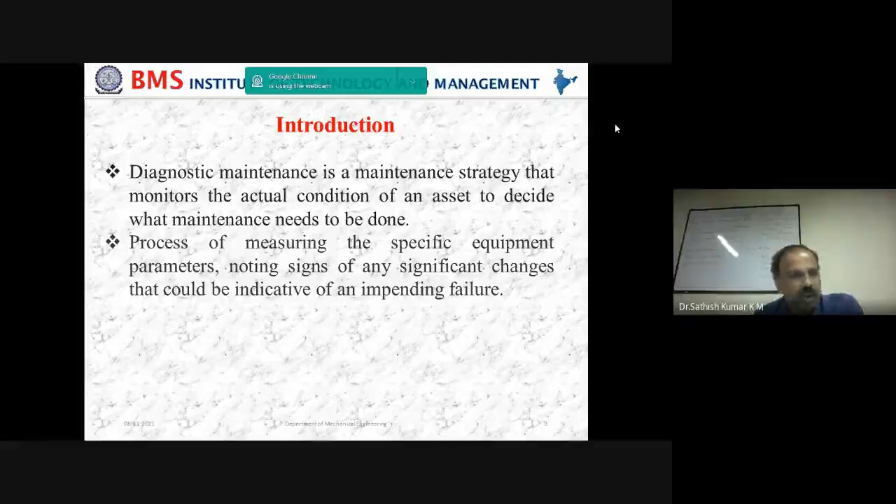Now what might be the basic goal of diagnostic maintenance? Basically, the goal is to monitor and spot upcoming maintenance or equipment failure. That is very important, so we are going to proactively schedule when exactly the maintenance strategy has to be made, and not before.

Now what's going to happen if it is a breakdown maintenance? You let the breakdown occur. It's a very simple technique, you let the breakdown occur. Once the breakdown has occurred, then you do the analysis and the rest of the activity.

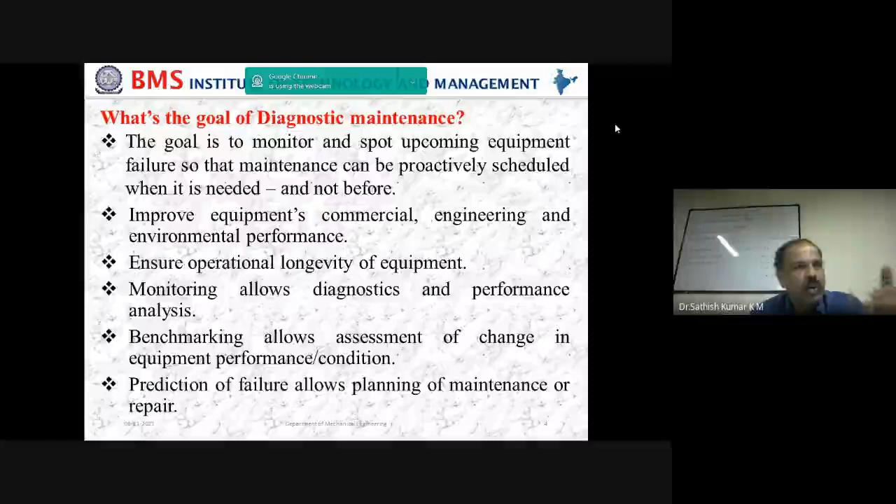If it is going to be a preventive maintenance, every now and then you plan your activity, you make what is called the plan to occur. In case of preventive maintenance, there is going to be a fixed schedule of maintenance. So whether it is required or not, at those fixed schedules you are going to check the machineries.

But in case of diagnostic maintenance, it is the process wherein you are checking the health of the machineries continuously and take an assessment when it is needed, and not before. That is very, very important.

By doing this diagnostic maintenance, it improves equipment performance with respect to availability. Maybe commercial availability means if it is available more, we will be getting more profits, along with engineering and environmental performance. It ensures operational longevity of the equipment, which is much required. If the machines are available for a longer duration of time, then it is ensured that you could produce some component out of it.

Monitoring allows diagnostic and performance analysis. Benchmarking allows assessment of change in equipment performance and condition. So monitoring, benchmarking, and prediction of failure are the main goals of diagnostic maintenance which are present.

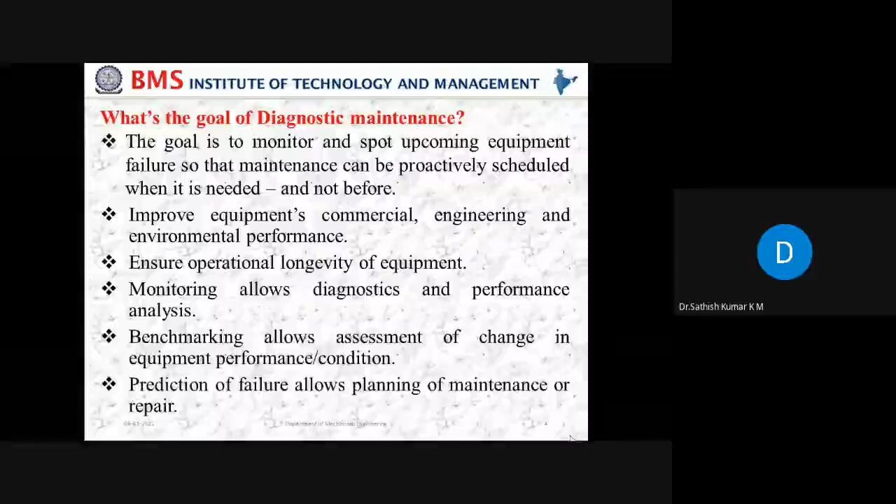With this brief on the goal, we'll just move on to the methods. When you go with the methods of diagnostic maintenance, we have two different diagnostic maintenance methods which are present: one is called trend monitoring, the other is condition checking.

Now we shall just go on understanding one by one.

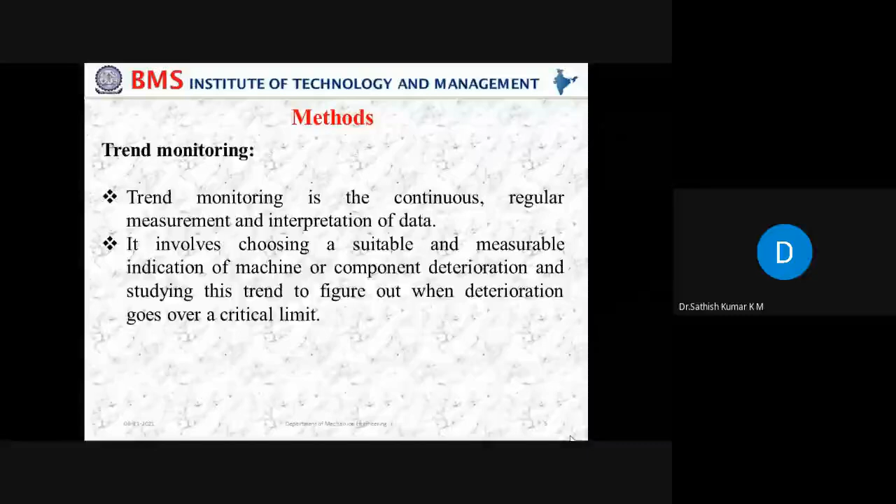Then the second one is called condition checking. The second type is condition checking, where it involves taking a periodic check measurement with an appropriate indicator while a machine is running. This is very important - it's what is largely used in industry, where you continuously go with a periodic check measurement with an appropriate indicator while the machine is running.

The information from this method is then used to measure the condition of the machine at a given time. Once you take note of the values that you've got, then based on those values, you measure the condition of the machine at that point of time. So this condition checking involves broadly three different steps.

So basically it is detection, diagnosis, and... the first one is detection. When I say detection, it refers to the 'when' aspect - it involves identification. The detection involves identification of the developing fault at an early stage. It tries to detect.

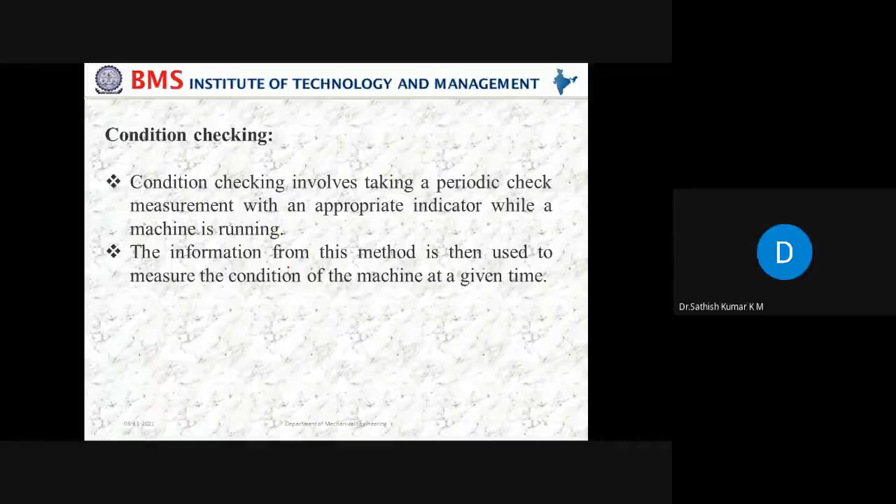Then when it comes to the different types of condition monitoring, basically we have the offline condition monitoring method and the online condition monitoring method.

So basically, if it is going to be offline condition monitoring, the work involves stopping the machine to take the vital parameters. It is not advisable in an industrial environment to stop the machine for this type of activity. So generally offline condition monitoring is used for less critical or semi-critical assets, where periodic scanning is good enough to observe the current condition.

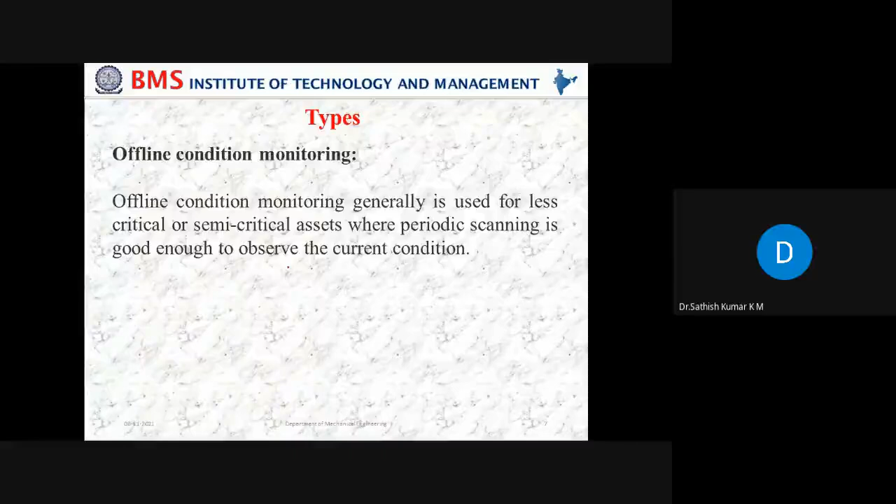But largely what we use is what is called online condition monitoring. Here, what is very important to know is the importance of sensors. The role of sensors is going to play a major role in online condition monitoring, wherein you are going to wirelessly connect the machine-mounted sensor to the software.

So you will have sensors mounted on the housing of a bearing, sensors mounted on the headstock, sensors mounted beneath the tool. You might also be using an infrared gun pointed towards the cutting tool to measure the temperature. These are all machine-mounted sensors.

Now, from these machine-mounted sensors, we try to take the information to various different softwares that are available, the diagnostic softwares, to know the real-time happening on the shop floor. Therefore it is very clear to state what is happening.

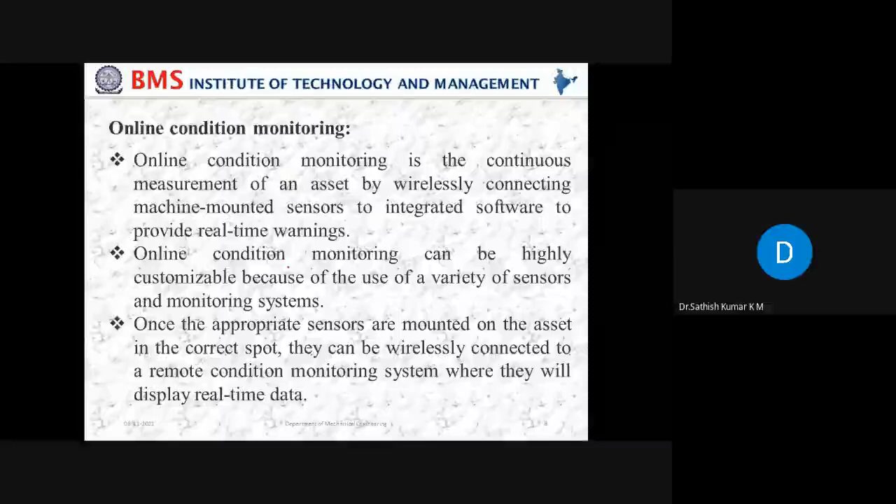That is very important - you need not sit there in front of the system or in front of the machine to see the activity. You can remotely connect the readings to the systems at the office environment, and you can sit at the office and observe the real-time variation of the data. That is the beauty of online condition monitoring.

Now, continuing with that, it's also possible for you to integrate multiple sensors - that is a multi-sensory approach. This is very important, because for an impending failure to occur, please understand it is not only the vibration that matters, it is not only the acoustic signals that matter, it is not only the temperature, it is not only the ultraviolet rays that matter. The failures can be detected through various different parameters.

Hence, it could be possible for me to take the vibration data, or the thermography data meaning the temperature data, or the acoustic data, at a given time. When you take this data, it is possible for you to give real-time alerts to various different people who are present with these activities.

So with the understanding of offline and online monitoring, basically what we are looking at is only the online monitoring, where we are going to extract the data from multiple sensors and analyze that data in various diagnostic maintenance software, and based on the data we analyze, we are going to say what action needs to be taken if there are changes in the critical parameters.

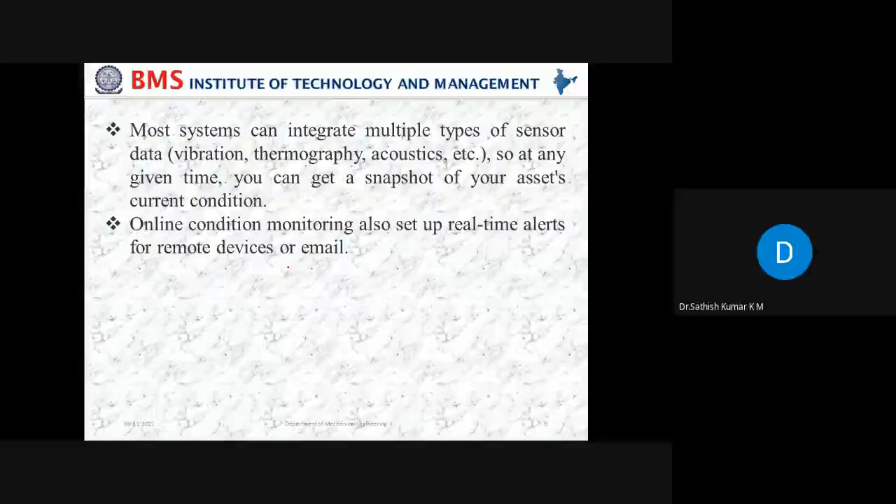Okay, so that is basically right. Then we'll just try to understand something called the PF curve.

This PF curve has time on the x-axis, and on the y-axis we have the condition of the asset, or the health of the machine. So with variation in time, how the health of the machine varies, that's the PF curve.

Over a period of time, I'm talking about the interval between the potential failure and functional failure. P is the potential failure, F is the functional failure. The potential failure is defined as the starting point at which the machine starts to deteriorate.

It is the point where the problem starts to begin. Then the functional failure is the point where it has reached the stage where it is no longer possible for it to function anymore. That is the last stage of operationality of the machine. So potential failure is the first stage of the problem beginning, and functional failure is the dead state.

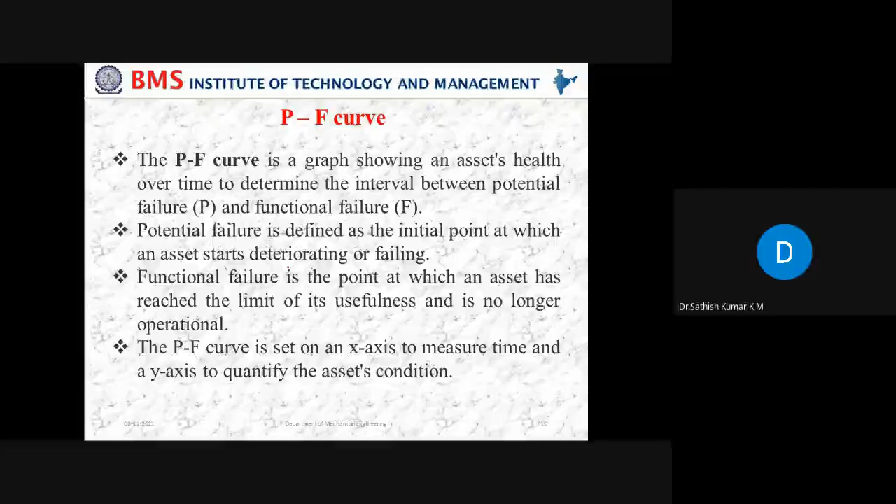Now this is what is called the PF curve. It looks something like this. This is where the problem started - potential failure, the problem has started, and as time progresses...

the health of the machinery starts to reduce, and at a certain point of time, there is going to be a functional failure. That means at that point, the machine is not available, the machine is not functional, that's it. Now the time interval between the potential failure and the functional failure is what is called the PF interval.

Now as a diagnostic maintenance engineer, our job is to make sure that you need to have a diagnosis well before this PF interval, right? Because this is where the problem started to occur, then this is where the problem ends.

The problem has reached the maximum stage. So when you plan, make sure the maintenance activity happens before the PF interval. If it happens after the PF interval, it means you've taken the diagnosis option once the machine has already failed, which doesn't make any sense at all.

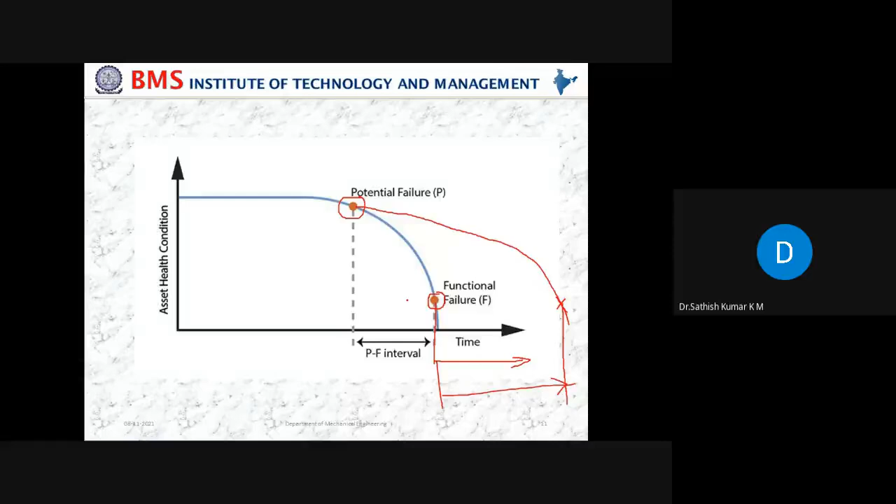So probably, just as a picture - this is going to be my point of failure. Let's say I could increase from this point to this point. I have elongated, I have improved the life of the machine to this extent by having a proper diagnostic operation or proper diagnostic maintenance. That is what is called the PF interval.

That means condition monitoring plays a significant role in detecting the PF interval of the PF curve. So as I said, the PF interval is the time between an asset's potential failure and its predicted functional failure. Now what is required is the inspection interval should be smaller than the PF curve.

Now the inspection - what are you going to do? It should be smaller than the PF curve, and it should end up maximizing the PF interval. So this is very, very important. The ultimate objective of diagnostic maintenance is to increase the PF interval. So this is about the concept of the PF interval.

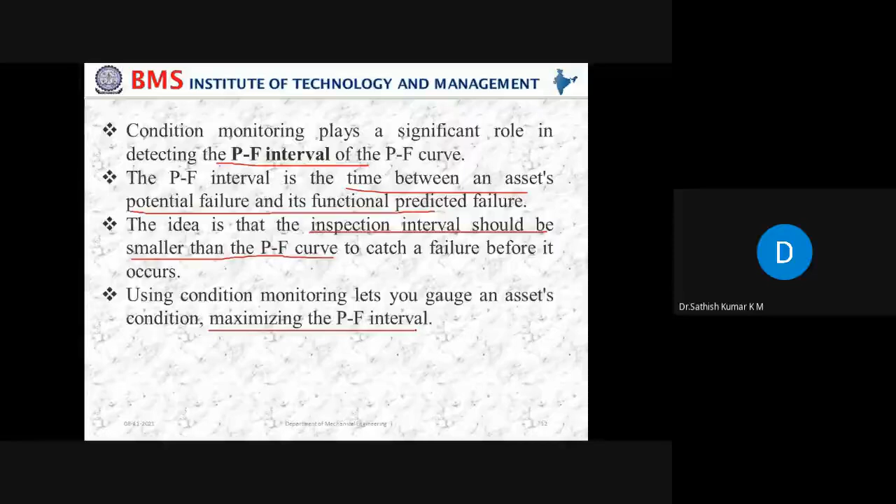So now with this, we've covered the basic idea about the introduction to diagnostic maintenance, the types and methods, offline and online monitoring, and the PF curve. Then we'll switch over to the various different diagnostic maintenance techniques which are available. I will briefly touch upon the various techniques, and later in the sessions you will have a session exclusively on these individual techniques.

Okay, as the first session, I just thought to have a brief idea about all this.

Now when you go with the diagnostic maintenance techniques, I just listed the commonly used ones: visual inspection, vibration monitoring, AE monitoring or acoustic emission monitoring, oil analysis, infrared thermography, ultrasound testing, and remote visual inspection. So these are the commonly used techniques.

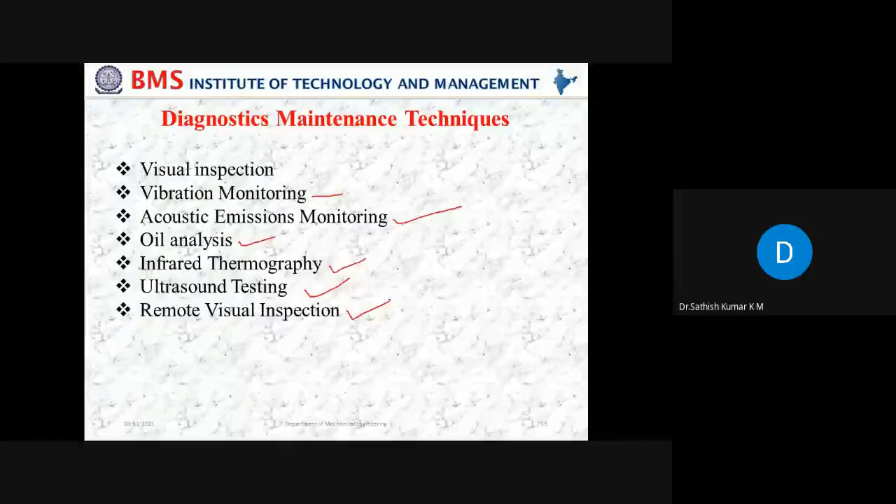Let us just have a look at each individual technique, what exactly they are about. Now, visual inspection. It's pretty clear. So what is visual inspection? Seeing is believing. I'm going to observe, make a note of it, and make a decision. As simple as that. Basically it's an inspection of an asset made using the naked eyes. You just observe.

While moving in the shop floor, you keep on observing what exactly are the changes present on the machine. Even though it's just an observation, it is very much required to have specific training, so that at least the inspector knows what to observe. That is very important. Just observing doesn't make any sense. What you need to observe is what matters in visual inspection. Otherwise this visual inspection is just like a tour, and nothing is going to come out of that. So what to observe is what matters.

As you know, it is the very oldest one to evaluate the condition of an asset. Here the goal is to find anything that might be wrong with the asset which could require maintenance. It is not specific to any particular parameter; it is on the overall front of the machine. You just look at the machines and understand what might be the problem.

But generally, this visual inspection cannot be considered authenticated, or you can't rely completely on visual inspection, because there are impending failures happening due to parameters within the system. Anything outside the system you could observe and gauge, but some changes happening within the body are highly impossible for an inspector to look at. Therefore, we come to the various different types of monitoring systems.

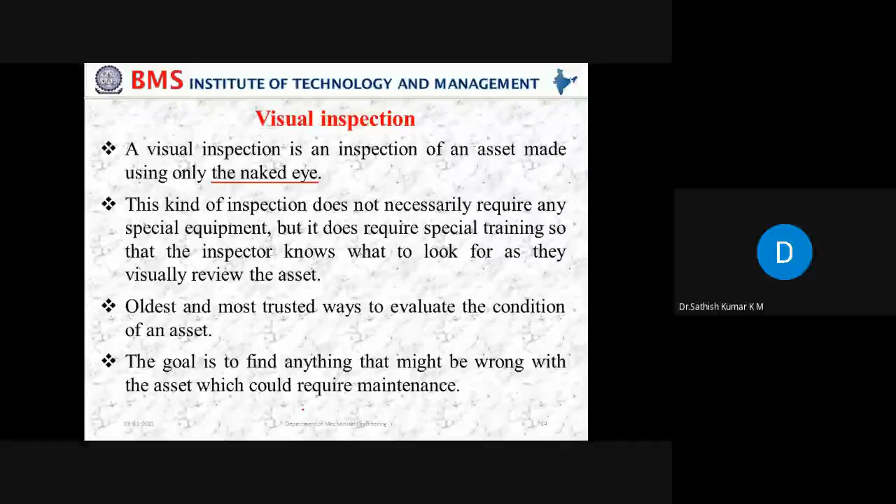These monitoring systems require what is called sensors, to pick the sensory data and changes in the parameters. For that we have various different techniques. The second one is vibration monitoring. Now largely the majority of machines fail due to the vibration aspects of the machines.

If you understand the total failure statistics of machines, they generally fail due to vibration aspects. Now the basic understanding of vibration: it's a physical movement or oscillation of a mechanical part about a reference position. From a reference position it starts to move to and fro, so we call it vibration. Every creature on earth is going to vibrate, just like anything, and machines will also vibrate. The question is, vibration is part and parcel of the story, but what amount of vibration is acceptable is what we need to take care of as a maintenance engineer. Now the signature, we call it a signature, is nothing but the undulations or variations in the parameters due to this vibration aspect.

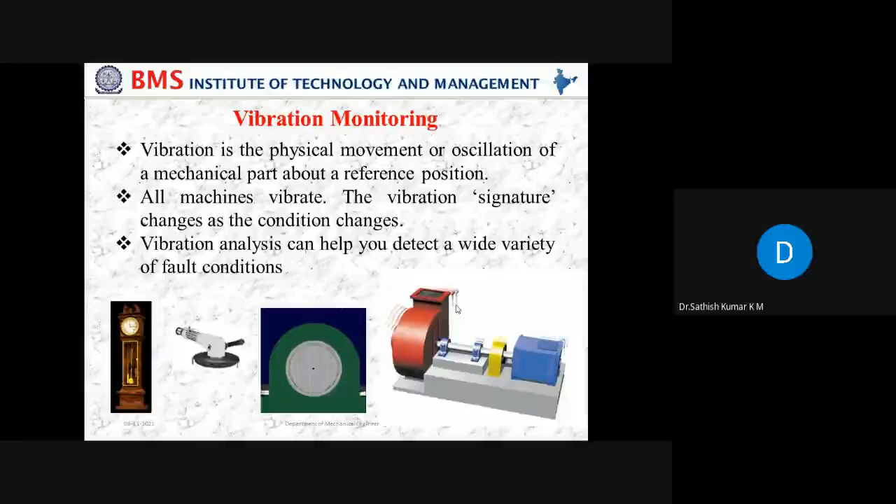This vibration analysis can help detect a wide variety of fault conditions. It's an important indicator of the mechanical integrity of rotating machines, so it's applicable to rotating equipment. Vibration within rotating machinery tells a great deal about the condition of that machine, and detailed vibration analysis can reveal far more information. Broadly, we can define vibration analysis as a process for measuring the vibration levels and frequencies of the machinery, then using that information to analyze how healthy the machines and their components are.

Now, it's the process of measuring the vibration levels. As per our International Organization for Standardization ISO 10816, it specifies what vibration levels are acceptable depending upon the type of machine, so we can have clear-cut data about the amount of vibration levels which are acceptable and which are not.

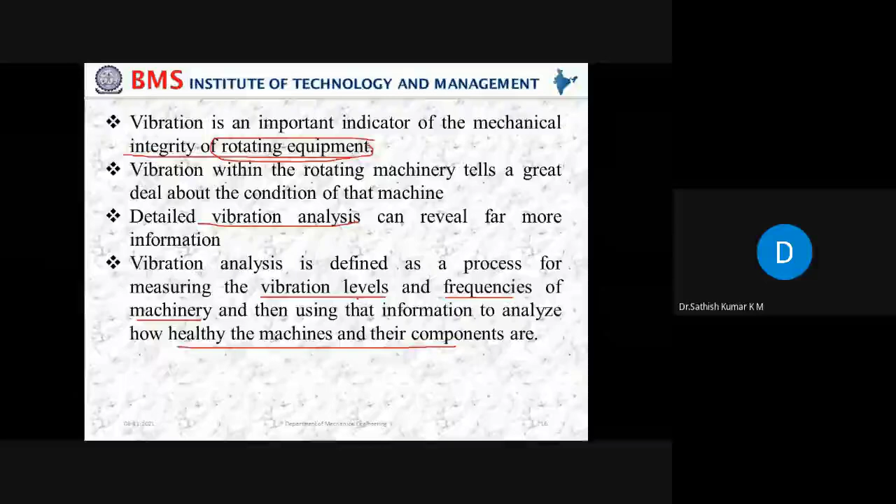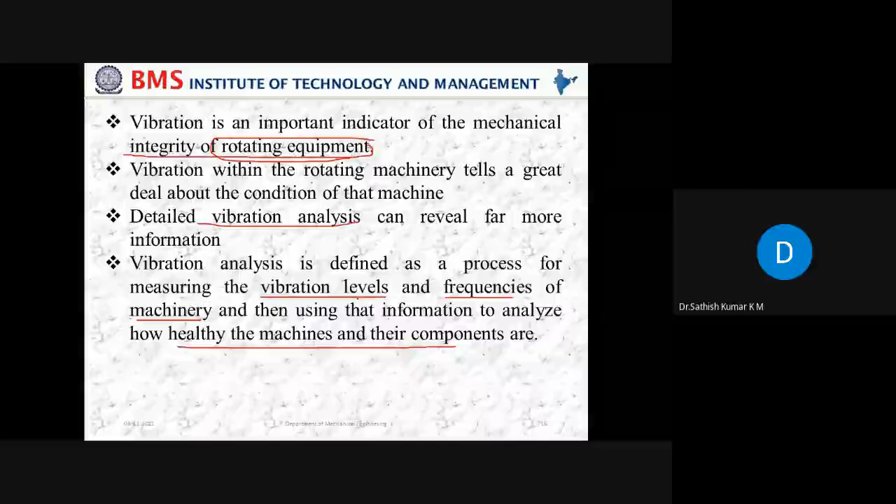Now, by having an accelerometer or a vibrometer, we can pick the vibration signal from the rotating machineries and analyze it. Now, in order to do this operation, before that we'll try to understand what are the different defects which could be detected through vibration analysis.

Now, during machinery operation we will be having various different defects. So which are the ones which could be largely detected from vibration analysis? The first one, and a very important one, is called unbalance, or you can also spell it as imbalance. Unbalance is the most large machinery defect which could be detected through vibration analysis.

Unbalance occurs for a rotary machinery. Any rotating member might come across this concept of unbalance. This unbalance is created when the center of mass differs from the center of rotation, that is F equals mr into omega square. Whenever there is a difference in the rotation axis, it creates what is called a centrifugal force.

This centrifugal force will try to take the body in the outward way. When it takes the body outward, it gives rise to high vibration amplitude. Basically, this is simply an uneven distribution of mass. The unbalance results due to the uneven distribution of mass about a rotor's rotating axis.

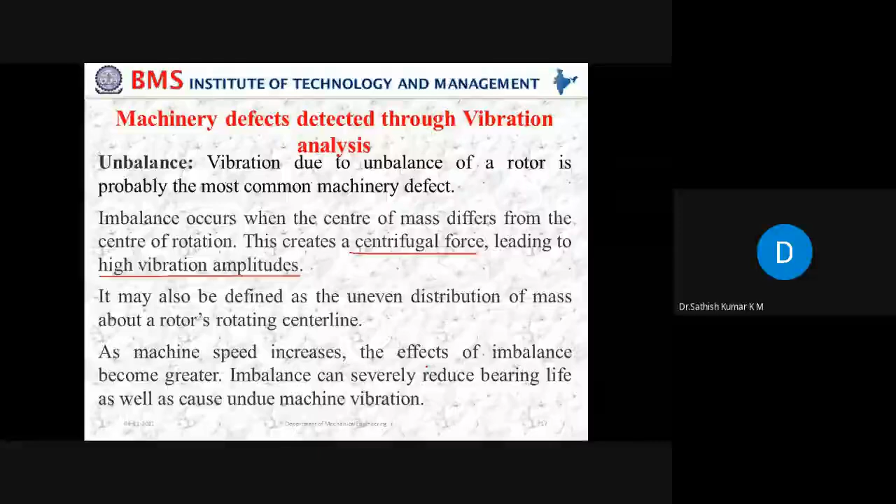The next one is misalignment. This misalignment can result when the machine shafts are out of line. That means the two shafts connected with a coupling, when they rotate, there might be a possibility of misalignment with the axis of rotation.

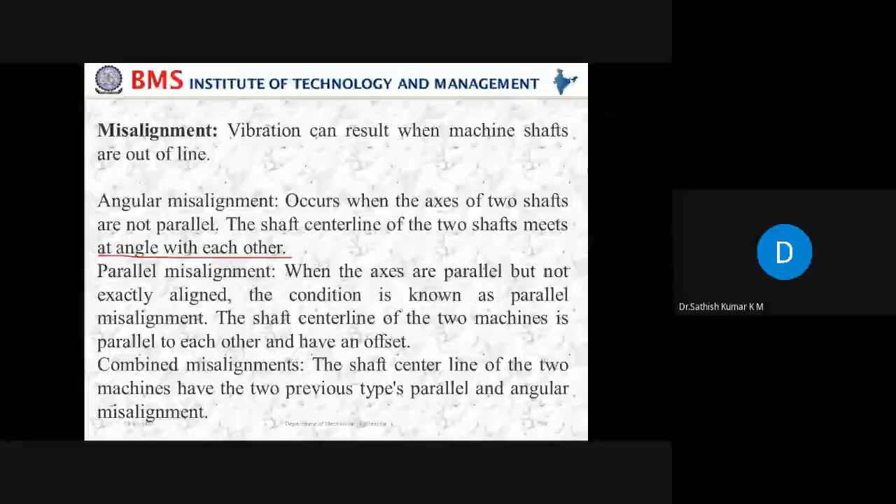So accordingly, we have three different types of misalignment. Broadly, angular misalignment, whenever the axes of the two shafts are not parallel and meet at a particular angle, there is some angularity between the axis of the shaft, so it's an angular misalignment. Then parallel misalignment, when the axes of both shafts are parallel but not in line, they are out of line by a small variation, that is called parallel misalignment. Then combined misalignment, which has both.

Now, a simple figure to analyze the concept of alignment. This is where the center line of one shaft is exactly in line with the center line of the other shaft - an expected arrangement. But with unbalance, other issues, or temperature changes, there might be a shift, where the center line of one shaft is not in line with the center line of the other. This gap creates uneven rotation between the two - that's called parallel misalignment. Then we have the angular misalignment.

The axis of one shaft making an inclination with the axis of another shaft is called angular misalignment. The combined type is the combination of both parallel and angular misalignment.

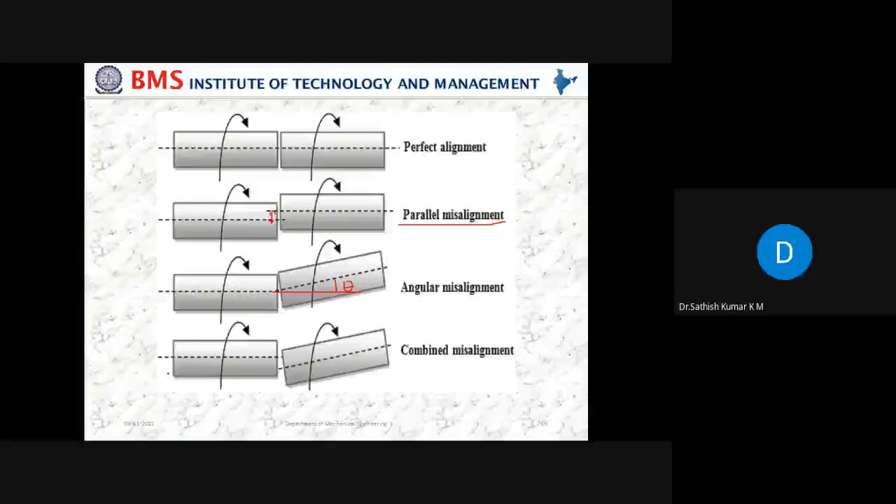Now this is the second one. The third one is looseness. This mechanical looseness occurs when the rotating component has been fitted incorrectly, such as bearings fitted onto the base improperly. This looseness means there is no stable base, so whenever rotation occurs or failure happens, vibration problems start to come into picture.

Other than unbalance, misalignment, and looseness, there are other common faults in rotating machinery. These include eccentricity, there might be an air problem, or there might be a whirl problem, such as an oil whirl problem. So eccentricity is another problem that occurs in these machineries.

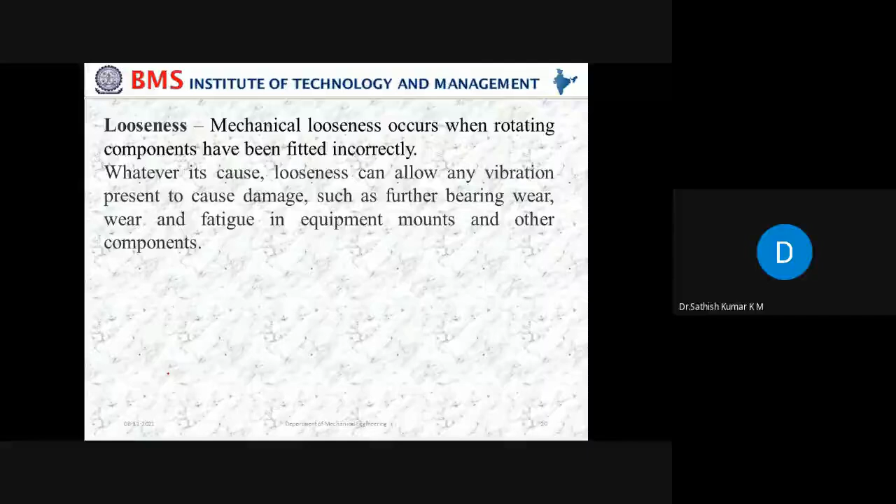Generally, unbalance, misalignment, and looseness are the ones which give the largest amount of vibrations to the sensor. Then, what are the parameters defining the vibration signal?

This covers the basic introductory aspect of these concepts. The parameters which define vibration signals are amplitude, which is the size of the vibration signal, and it indicates the severity of the fault. As you know, higher the amplitude, higher the vibration.

Then we have frequency, which is 1 over the reciprocal of time. Frequency is the number of times an event occurs in a given time, and this one event is called a vibration cycle. In this one vibration cycle, some peaks are present, and these peaks are called frequency points. These peaks might be at 1x, at 2x, meaning at the harmonic level, or at the subharmonic level.

What we need to understand is, if the peaks are coming exactly at an interval of time, then it is due to a particular defect. If the frequencies occur in a harmonic style, at 1x, 2x, 3x, 4x, or similar, the types of faults occur at a particular time. This is a very important point: the types of faults typically occur at certain frequencies.

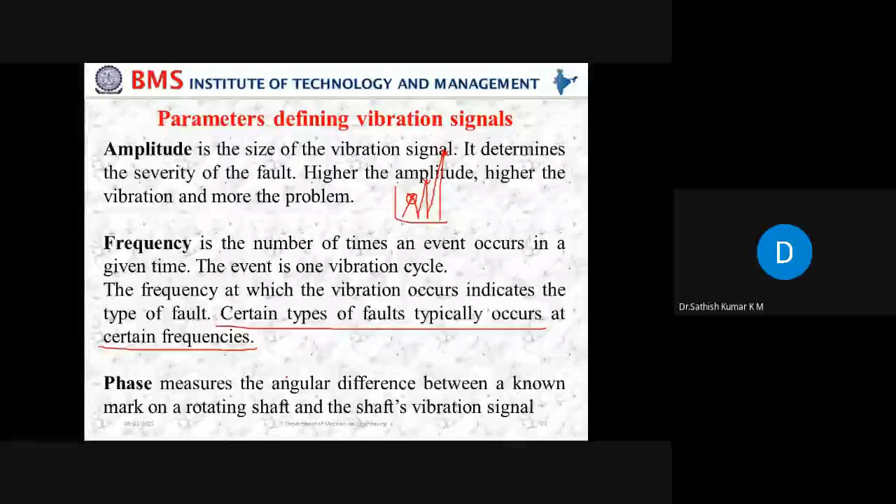Then, what are the characteristics of vibration? The characteristics of vibration are displacement, velocity, and so on, these are the simple terms. Displacement is how much deviation occurs from a particular mean position; this is called displacement.

The first derivative is going to be the velocity, and the second derivative is going to be called the acceleration. Okay, now you could able to measure the displacement, velocity, and the acceleration.

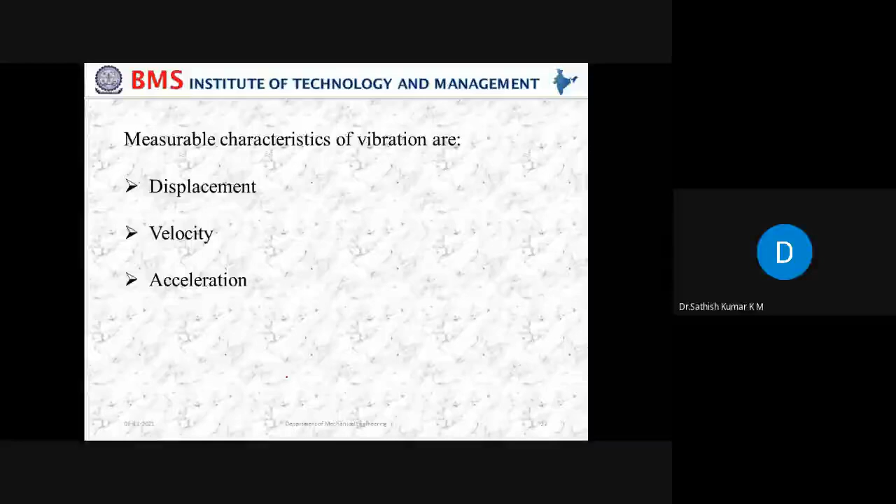Then when it comes to the analysis technique, we have time domain analysis and frequency domain analysis. In case of time domain analysis, it is the plot made with respect to amplitude versus time. Amplitude is nothing but the vibration that you get from the sensor. So you place it on the oscilloscope, you get the waveform, and that waveform, if you analyze it, is in the time domain. So it is amplitude plotted against time.

By using the FFT, fast Fourier transformation, you could convert the time domain into the frequency domain. In case of frequency domain, it is frequency versus amplitude. On the x-axis you have frequency, and on the y-axis you have amplitude. So time domain is converted into the frequency domain.

Now analysis could be done by using time domain, or could be done by using what is called the frequency domain option also. So this is the general thing, right?

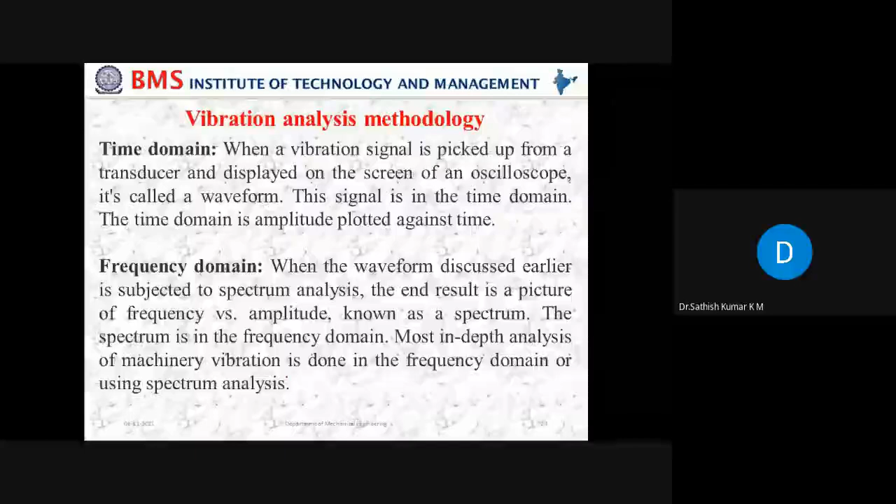That is, the spikes are going to be your frequency plots. You can observe a larger amount of frequencies, which is going to say about the health of the machineries. Now with the usage I have here.

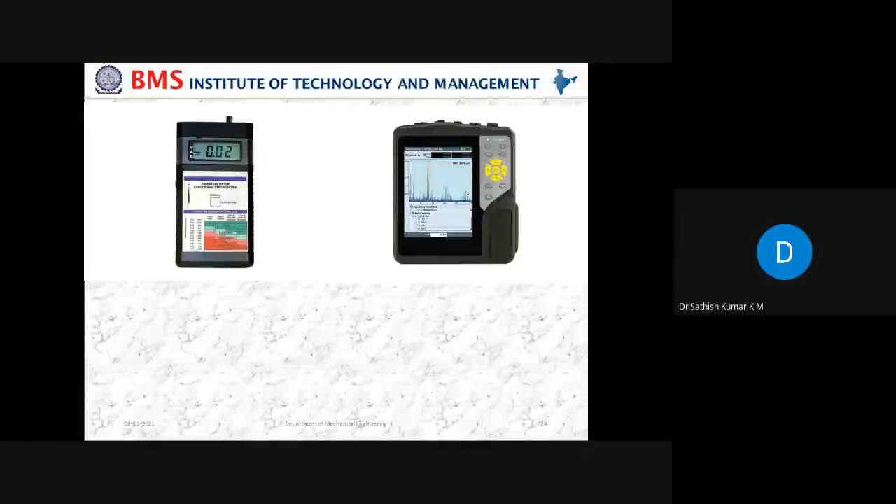Now these are all the practices that one could make with respect to the concept of vibration monitoring. Now this is broadly about the concept of vibration monitoring, wherein you will be having accelerometers which are going to be placed on the housing, and you could able to get the readings.

Basically, this placement of the accelerometer itself is going to be a very important aspect. Now whenever you are going to place the accelerometer, the direction at which you are going to take the data is very, very important. Now the vibration may be an axial vibration, the vibration may be a radial vibration, or the vibration might be the combination of both axial and radial.

Now the type of the failures that you are going to pick up is going to be very, very important. So accordingly you are going to place the accelerometer at a particular location, so that you take the maximum information.

Just let us observe that you are placed on the vertical housing of your rotor. Now assume that there is going to be a larger horizontal vibration, which may not get picked up, and that horizontal vibration is going to be missed out. So therefore it is better to have the information from all the sources, so that you can make a good amount of decision.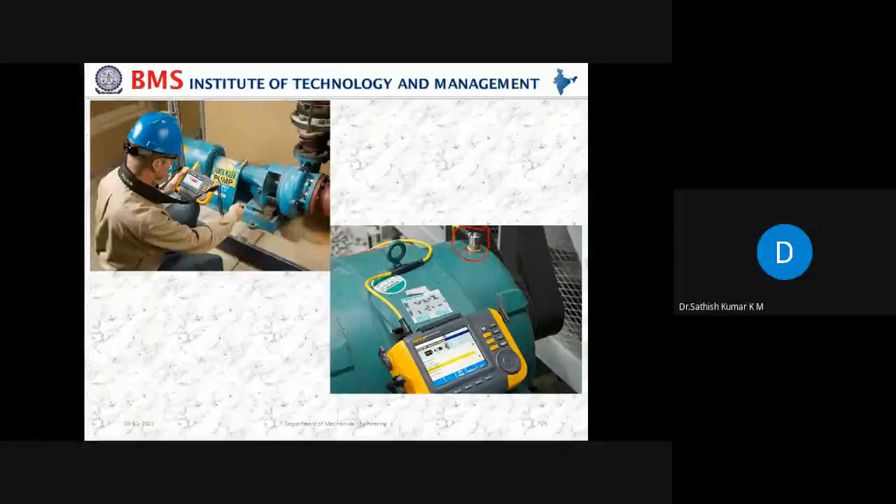So this is something called as related to the concept of vibration monitoring.

Then the second one we have what is called acoustic emission monitoring, which is called AE. It is basically acoustic, nothing but sound, so it's a sound emission. Let us put it like this. So now what is this basically?

It says that whenever there is going to be a defect present within the material, just we'll go like this. Whenever there is going to be a defect in the material, which is going to be considered as localized, something but a particular point, a localized defect.

Okay, so which has not been spread across - maybe a mark, might be a pitting defect, or fatigue wear, or a crack present in the system. Those are called localized defects which are present.

Now, in case of acoustic emission, it's a phenomenon where transient elastic waves are generated by the rapid release of energy from localized sources within the material. Whenever a sensor is placed, the acoustic transient changes with respect to time.

So transient elastic waves are generated with a larger release of energy from the localized defect. Wherever the defects are present, we could observe a larger gathering of data in the form of energy. So acoustic energies are present, and that acoustic energy developed at a particular localized point is the point of concern that you pick up by placing an acoustic emission sensor at important locations.

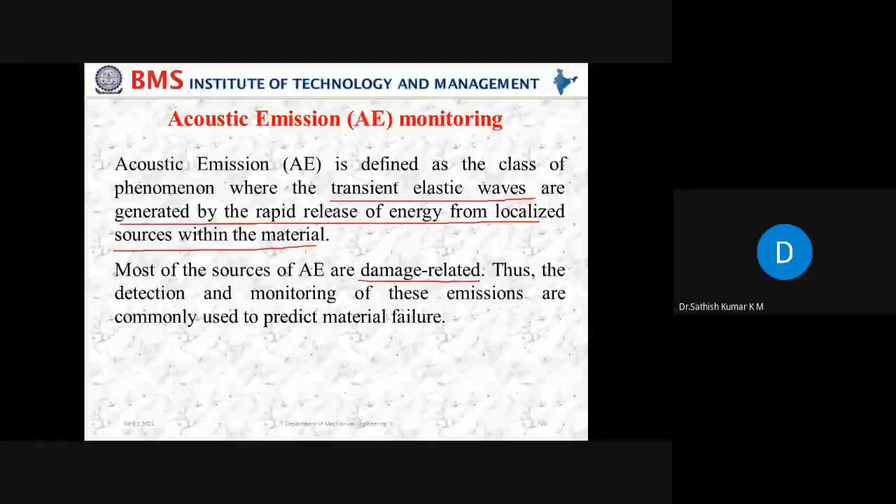Now, most of the sources of AE are damage related - that means nothing but the localized damage I was telling about. Thus, the detection and monitoring of these emissions are commonly used to predict material failure.

Just observe - the energy travels in a spherical wavefront and can be picked up from the surface of the material using highly sensitive transducers. Now this is very important.

Acoustic emission sensor placement matters a lot, because the defect is going to be somewhere else. If the sensor is placed at a certain location, the time with which the wave flows from the defect to the sensor area causes a diminishing reduction of the wavefront, and the data gathered will not be effective.

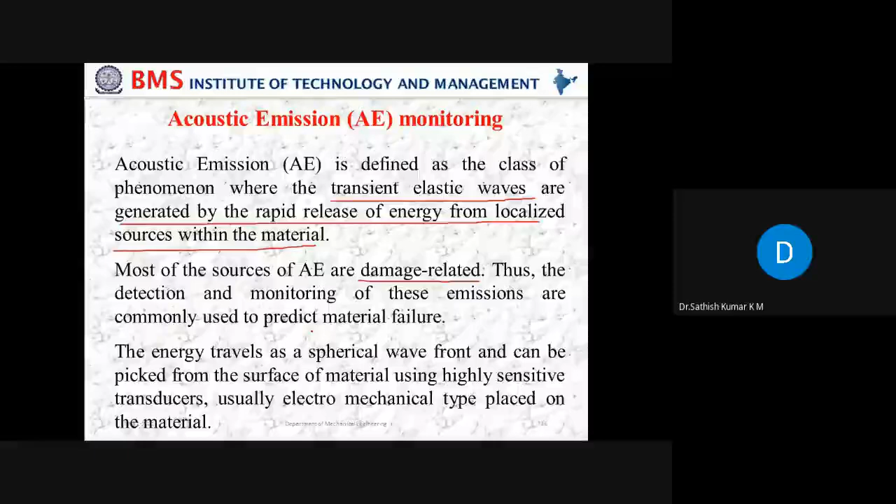Therefore, wherever the defects are present, the AE sensor should be placed there. The mechanical wave thus picked up is converted into an electrical signal, which on suitable processing and analysis can reveal valuable information. Now you can observe here.

So this is just a body we can observe - you have a sensor, and a localized defect present here. Because of that defect, transient elastic waves are generated and try to move around. Those transient elastic waves are picked up by this sensor, and that is taken to the AE instruments.

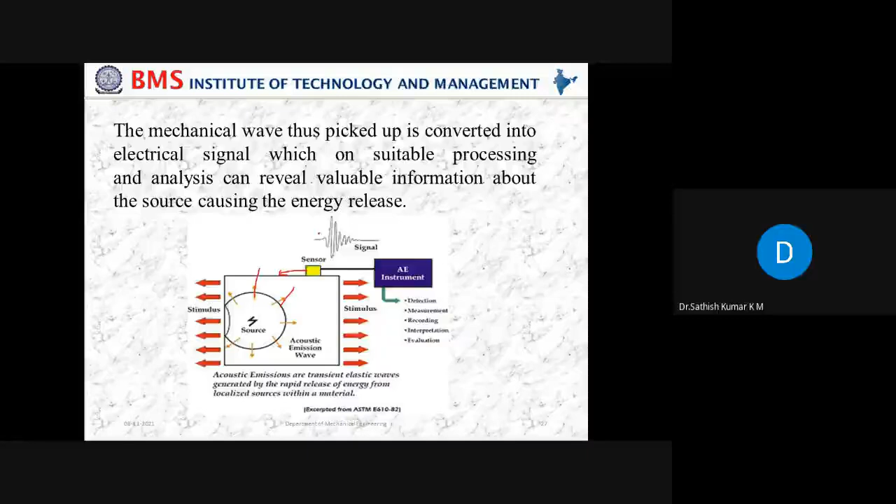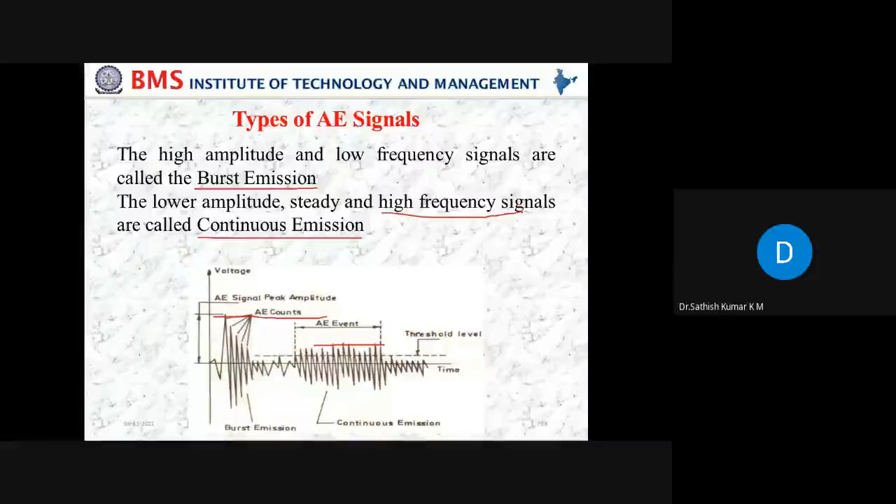Then there are very important parameters. This is the one which is very important, because there are plenty of parameters present with respect to the acoustic emission signal. So accordingly, I have listed some of the very useful parameters required to describe the machine.

One is called the threshold, the first one. Threshold is nothing but a voltage level - basically a preset voltage level that has to be exceeded by the response so that it could be detected as an AE signal. Threshold is a voltage which should be discarded, and why you need to discard it is very important.

Threshold is something - let's say some machine is running. Just assume a situation where the machine is running and there is some undue noise also present on the side of the machine.

The noise has also been incorporated into the system. Now if you are going to pick up the signal, you are picking the vibration of the machine along with the external noise, and that gives you increased vibration. So vibration within the machine plus vibration results due to the noise present outside.

In order to get the exact data, I want to pick only the data happening within the machine. Therefore, I will keep a threshold voltage. I will calculate the noise present around the machine and set the voltage for that noise, and any data which comes above that noise is considered for analysis. That is called a threshold. If you keep a very high threshold value, you are missing many information. If you keep a very low threshold, you are incorporating all the noise. So setting a threshold itself is a greater challenge in acoustic emission monitoring.

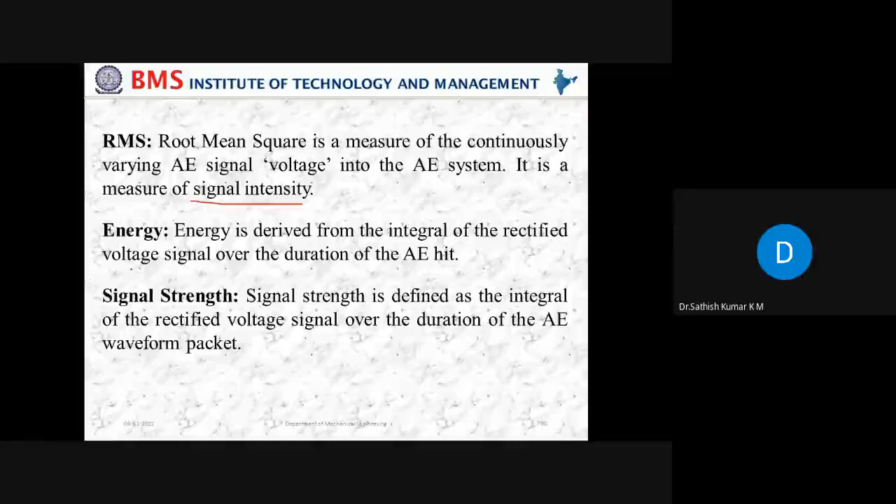Then we have the RMS, the root mean square, which is a measure of the continuously varying AE signal voltage into the AE system - it's the measure of signal intensity. Then energy, it is a derivative from the integral of the voltage level over the duration of the event and the signal strength. Both these are derivatives from the signals obtained, and this is the equation that you are going to get.

Now in your software, once you set this up, you will be getting all this data, and as a diagnostic maintenance engineer, we need to pick the right parameter required to analyze. Once you pick the right parameters, by plotting the graphs you could figure out exactly what the problem is.

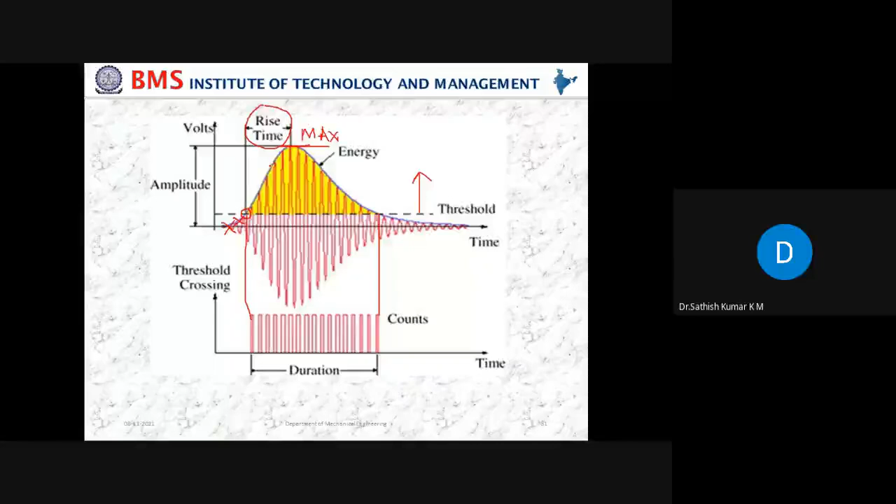Now, what does the AE system consist of? What exactly is required to make up an AE monitoring system? Basically, a typical acoustic emission system consists of sensors which are used to detect the AE events.

Now this portion is very important, wherein you are going to do the evaluation, analysis, and the charting. All these are going to be part of your analysis software.

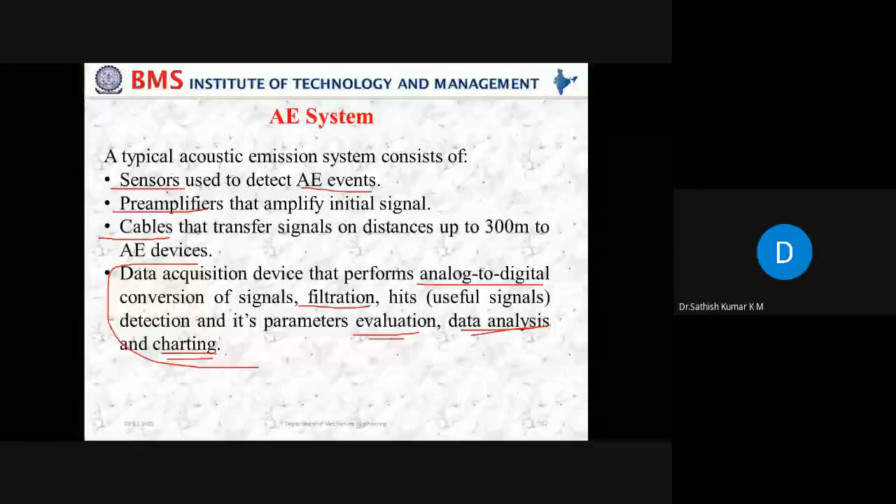Now you took the data from the sensor. You have placed the AE sensor exactly on the required position, and you could able to get the data. Please mind, there is a very huge amount of data which is going to be obtainable by using your AE system. So with that huge amount of data, what is it that matters to you?

That picking up of the right data itself is going to be a greater thing in case of the monitoring of AE, and subsequently after gathering, then how you could able to evaluate and how you could able to put it across onto a chart so that you can present it well to the required members is what matters. Hence, along with the sensor, along with the acquisition of the data, what also matters is how you are going to post process that data effectively.

So these are all the AE components. This covers a proper AE system, right?

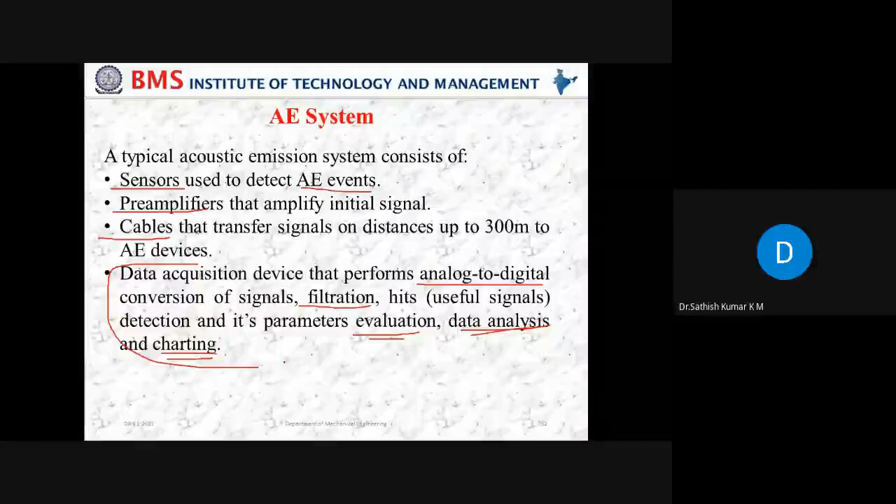Then from the application point of view, it's a good application area for the AE monitoring, basically detection of active sources, that means detection of defects. Crack propagation can be detected, along with fatigue, creep, fiber delamination, fiber fracture, and corrosion. All this is happening on the subsurface level, and these happenings can be detected by observing the waves.

Structural integrity can be evaluated, weld quality can be checked, so quality control, leak detection, and general laboratory studies also you could able to make. So this is broadly about the concept of acoustic emission monitoring.

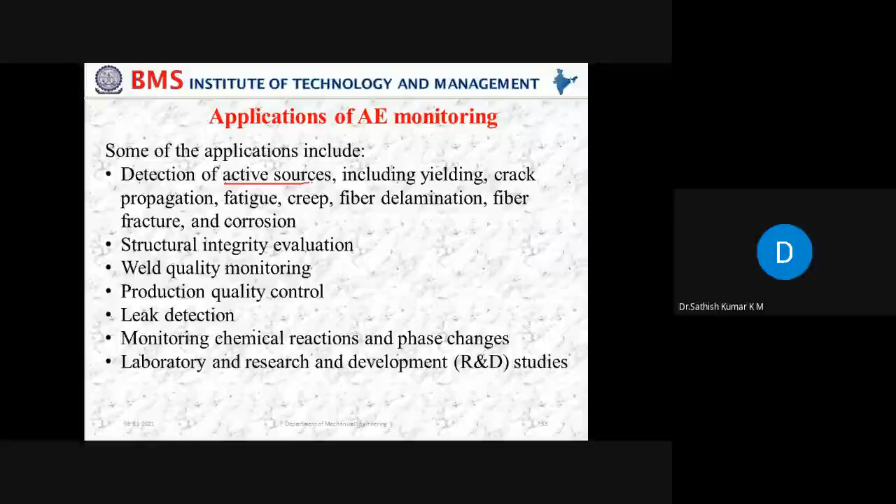Now this is just some of the snapshots. So to say, basically in case of pressure vessels and larger pipes, you could able to ping this, put this across onto an area and you could able to measure. So these are all the AE sensors which are going to be present, from the application point of view.

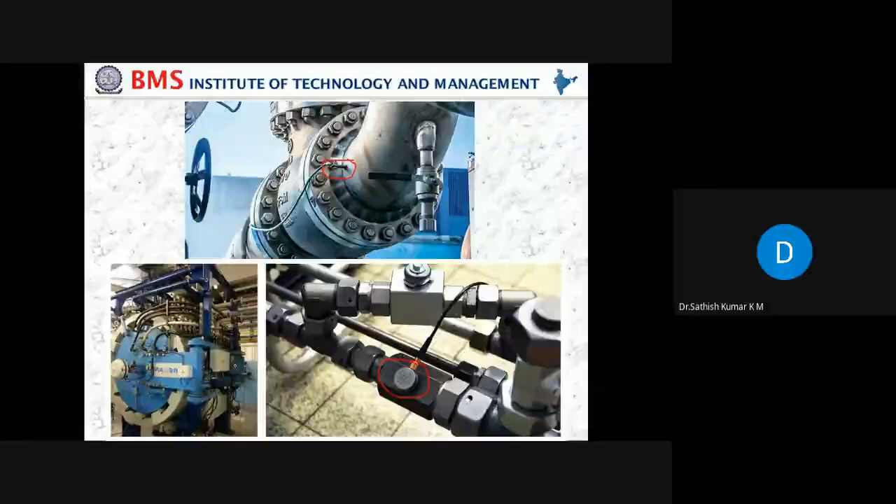Then we have the third one, which is called oil analysis. Basically the oil analysis, I'll rather call it as a blood test of a human being, correlated well with the oil analysis of machineries, as we go for a blood test.

So here we are going to check the oil samples and analyze for what are the variations. Basically, oil analysis is a technique which involves collecting and testing machine oils, equipment lubricants, or other fluid samples to ascertain the condition of the fluid and the machine. Whether the oil consists of samples of metals, or is it going to still have the potential of lubrication, or is it going to consist of acidity or basicity present - all that can be analyzed by collecting oil samples.

As we know, as machines wear, overheating is going to occur. Overheating has a trend towards failure. Contaminants are deposited in lubricating oil and other operating fluids. Once these contaminants are deposited in lubricating oil, when you collect the sample of oil from the machine, by analyzing the content of the oil you could able to say what are all the metal particles which are present.

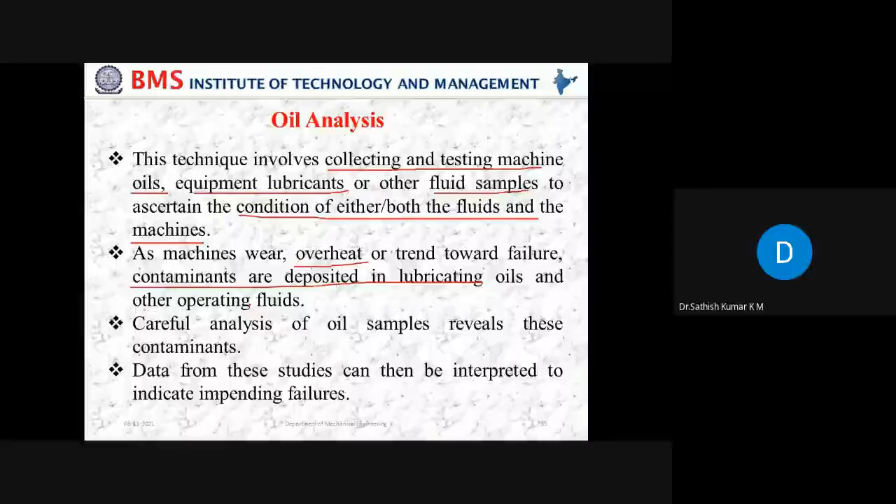By analyzing the metal particle, you could able to say where exactly the wear has happened - which part, which component of your mechanical system is actually being eroded or worn out because of the amount of heat. Understanding that is going to give you more information, and you can interpret the results in a better way.

So what are the benefits of oil analysis? Basically, it increases maintenance staff's general awareness about lubrication related issues, and it gives a better approach for maintenance. Well ahead of time, it gives an approach and it minimizes unscheduled downtime. No individual wants downtime where machines are not operating, so you could reduce this downtime to a maximum level. The minimization of downtime is possible by using oil analysis.

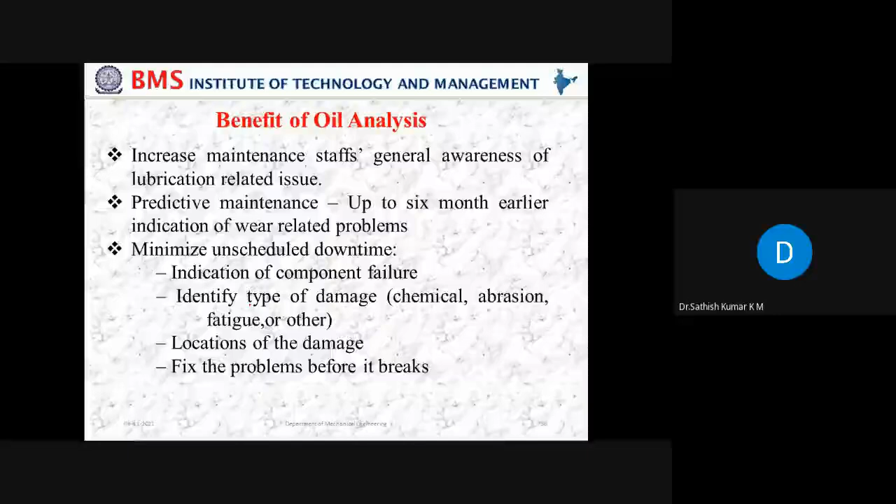The oil analysis provides access to the levels and types of contamination and wear in the oil, and it gives us an indication of whether it is still fit for use, or whether it needs to be changed.

As we could see in our own automobile, when we take out that lengthy pin and just observe what the oil level is by touching it, you could say whether it's required for you to change the oil or not. That is one type of visual inspection you could do for your vehicle. Similarly, there are plenty of other options also present.

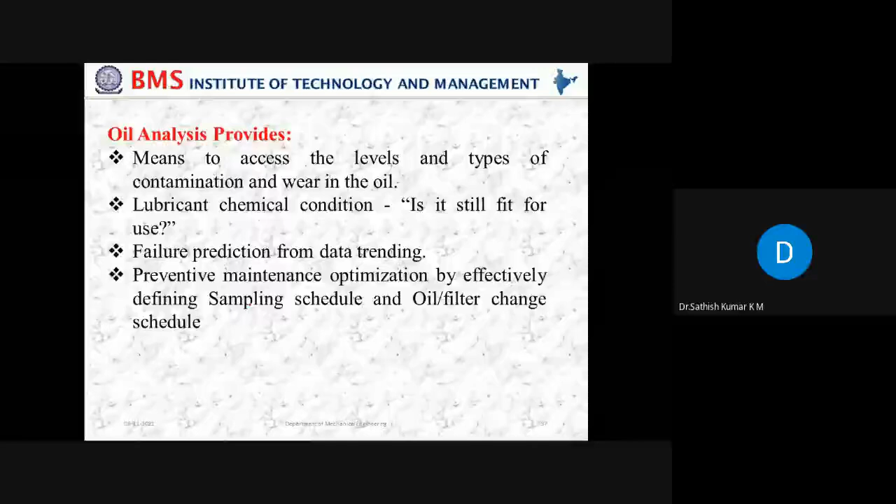The oil analysis categories are going to be three largely: one is fluid properties analysis, then contamination analysis, and wear debris analysis.

In case of fluid properties analysis, basically it tells about the status of the oil, whether it's in a physical state or a chemical state. You can understand the status of the oil and determine if there's any scope for you to use that oil for an extended amount of time. That is the remaining useful life, called RUL. You could calculate the remaining useful life, or whether it's really required for you to change now, or whether you can wait for some time.

This fluid property analysis will give answers to some questions: does the sample match the specified oil identification? Is it the correct oil to use? Are the right additives active within the oil? Have additives depleted? Has the viscosity shifted from the expected viscosity? What is the oil's RUL? If you could write down the answers to all these questions, then you could take a proper decision on whether to change the oil or continue for some amount of time.

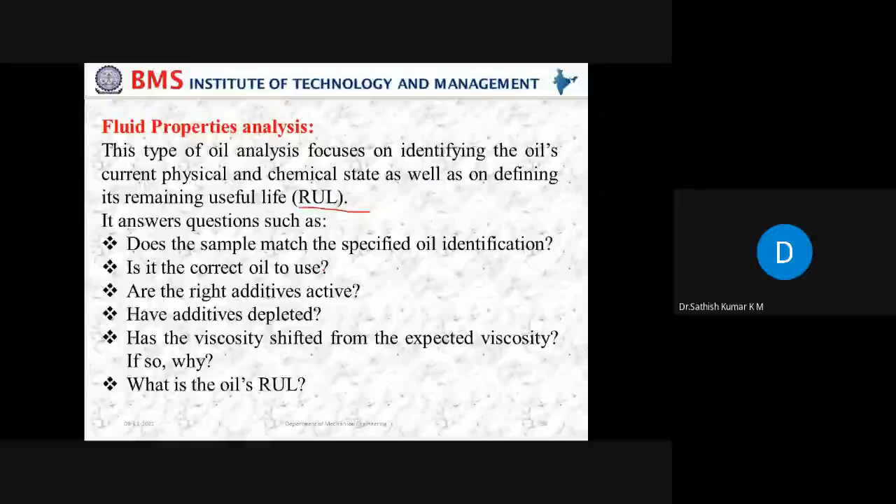Then we have what is called contamination analysis, detecting the presence of destructive contaminants and their sources. Based on the contaminants, you could understand what type of contaminants are present in the oil, whether it's copper, steel, cast iron, or whatever it is, then you could understand where this has come from. Definitely you pour the oil into the system, so the lubricating oil has gone through all areas of your mechanical system, right from the beginning component till the end. Once you collect it, you get to know the contaminants, and based on the contaminants, from which portion of your mechanical system they've been collected, you can understand the amount of destruction that has occurred to the mechanical system.

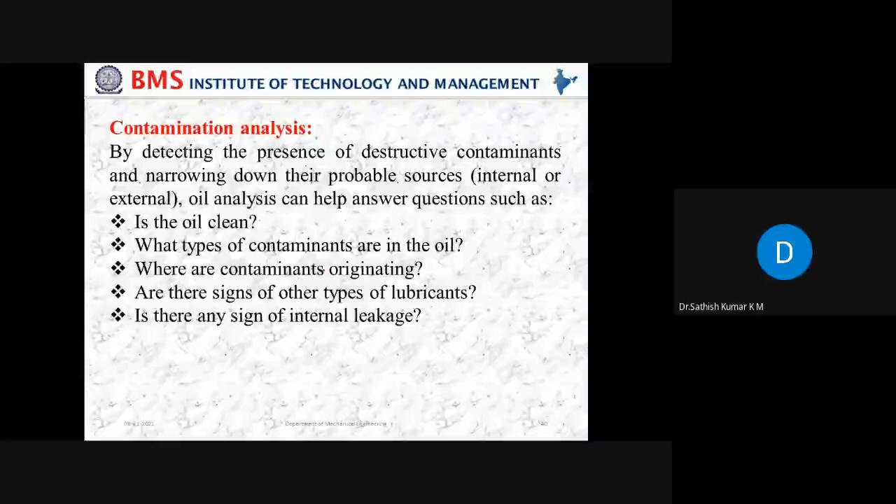Then wear debris analysis: this form of analysis is about determining the presence and identification of particles produced as a result of mechanical wear, corrosion, or other machine surface degradation. This is another different case of analysis.

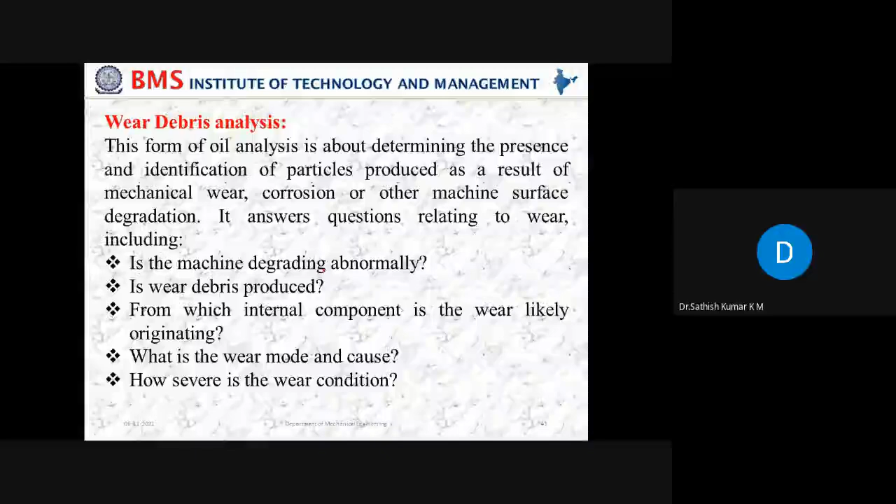Then these are the oil analysis tests which are going to be present: the oil analysis category and oil analysis test. For fluid properties, basically the basic test we do is viscosity testing, whether the kinematic viscosity or dynamic viscosity is within the limit or not. Then acid base number, then FTIR, then elemental analysis. Then contamination is about particle counting, which tells how much particle is going to be present in a particular sample of oil.

It may be 10 ml of oil you collected, and in that what is the particle analysis which is present. Then moisture analysis, which takes care of the amount of water content. If there is more water content present in the oil, the effectiveness of that oil has been reduced, and that you are going to measure using moisture analysis.

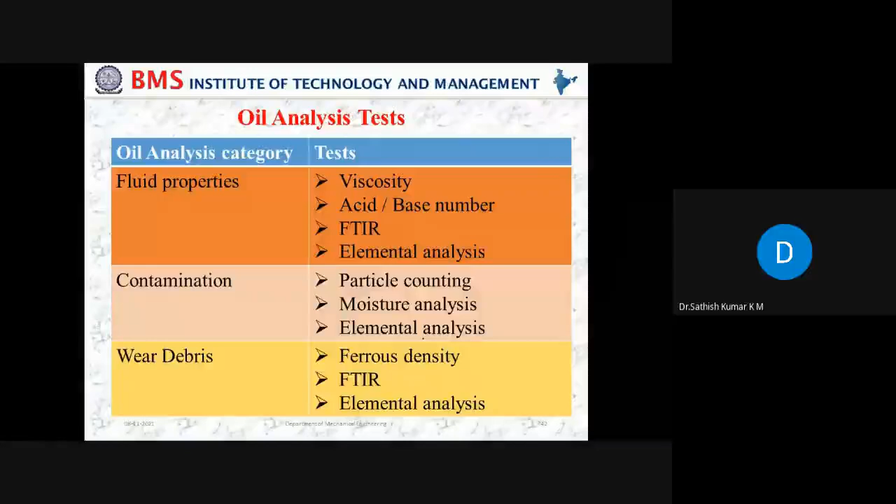Then elemental analysis, then wear debris, ferrous density which is ferrography, then FTIR and elemental analysis. Now here FTIR and elemental analysis are common, so we'll have a look very briefly at the concept of elemental analysis.

Basically it is about the principle of atomic emission spectroscopy, which is also called wear metal analysis. In this elemental analysis, it detects the concentration of wear metals, contaminants, or additive elements within the oil. Based on this concentration in the oil sample collected, we make a statement.

There are different ISO standards available for this elemental analysis. That means if the oil particle count is going to be this much, what is the situation present? What should be the maximum level of particle count present in a particular quantity of oil that you take? For 10 ml of oil, what is the maximum particle count of this particular metal? So there are plenty of ISO standards which are present.

Just for your information, we have general methods. The commonly used methods are RDE, that is rotating disc electrode, and inductively coupled plasma. So these are the things which are present.

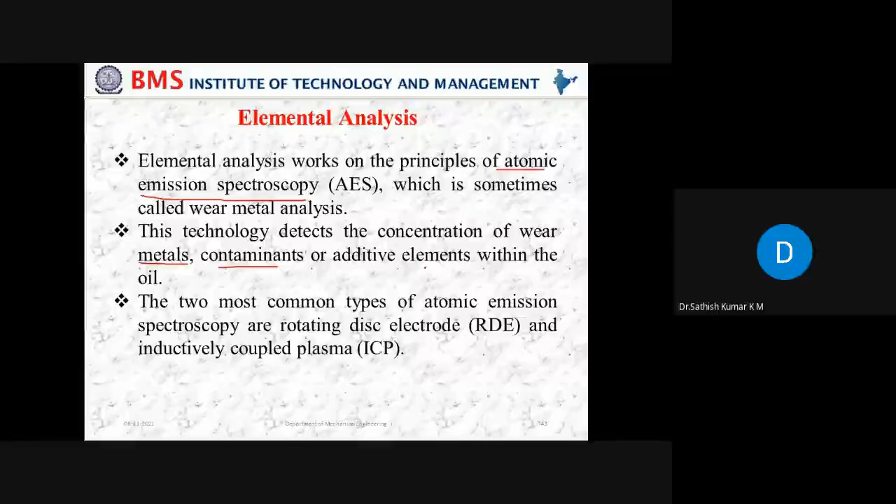Then we have FTIR, that is Fourier transform infrared spectroscopy. It works on the principle of infrared. It is mainly used as infrared light transmitted through a thin lubricant sample. You make sure the infrared light is passed across the lubricant sample you have taken. As we know, in the lubricant sample you might have some metals, and all those metals have a capability to absorb certain amounts of wavelengths.

Based on the wavelengths that are able to pass, as you pass the infrared rays with certain wavelengths, you could understand what type of wavelengths have been absorbed within the material. For example, if it's copper, it can absorb this amount of wavelength; if it's brass, it could absorb this amount of wavelength. Now the amount of absorption is directly related to the concentration of that particular molecule present in your oil sample.

Then you could observe, depending on the study of the spectroscopy, which wavelengths have been absorbed. So based on the wavelength value, you could say what type of contaminants or what type of wear particles are present within the molecule or the particular sample, and make a decision.

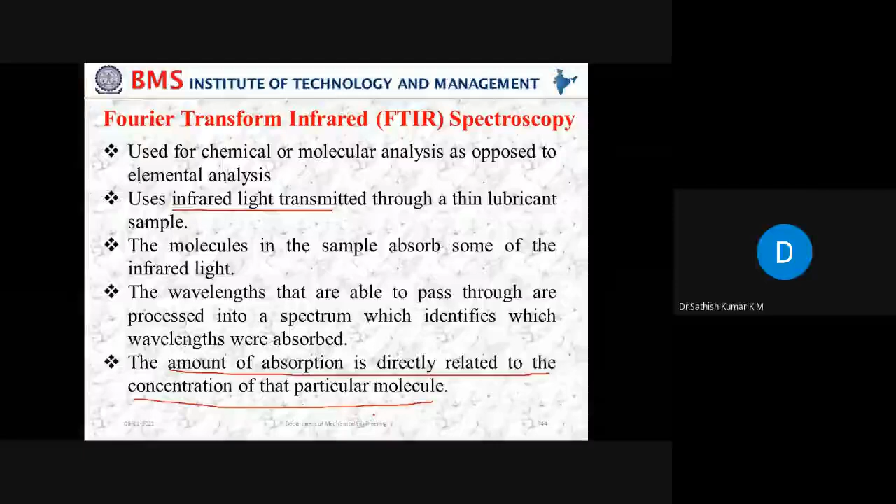Then the next technique is called infrared thermography. With thermography or infrared thermography, the parameter we are measuring is temperature. Thermography is a technique of analyzing the thermal characteristics of an object. I am interested in measuring the thermal characteristics of an object from its infrared image.

We have infrared thermography which allows you to observe the heat energy radiated by the object, that means a heated member, say after you have run the motor for a considerably large amount of time. If you take a picture of that motor using infrared thermography, you could see the image. From the image, you could judge by observing it what is the intensity of the temperature which is present.

Therefore, that means you are observing the temperature, you observe the temperature and you make the decision. So data analysis is used to identify potential failures or degradation of the equipment parts.

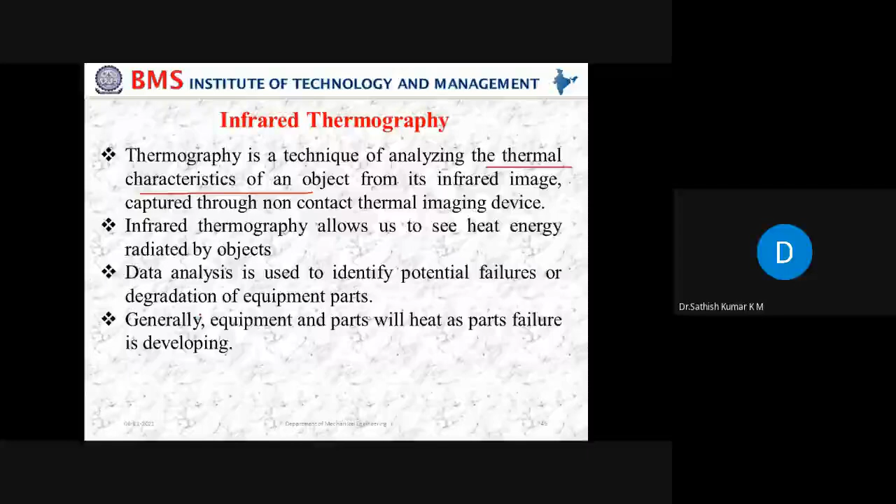Now here, basically the concept of heat comes in. Generally, why we go for infrared thermography is that it's a non-contact inspection technique, rapid scanning can be done, data can be recorded in different formats, and the images obtained are going to be more reliable and more comprehensive, because you are exactly capturing what is happening within the system.

Because in case of the previous sections we discussed, let's say vibration and the accelerometer, you need to place the accelerometer at the right spot. If you missed placing the accelerometer on the right spot, then the information you got may not be reliable. So the whole reliability of the information is dependent upon where exactly you place the sensors. That is going to be the catch there, the whole story revolves around where you have placed the sensor.

But here, when you are going to take a picture, you can take a picture of a particular item clearly, and a clear observation of the temperature is made by using infrared thermography. Right, now these are all the observations.

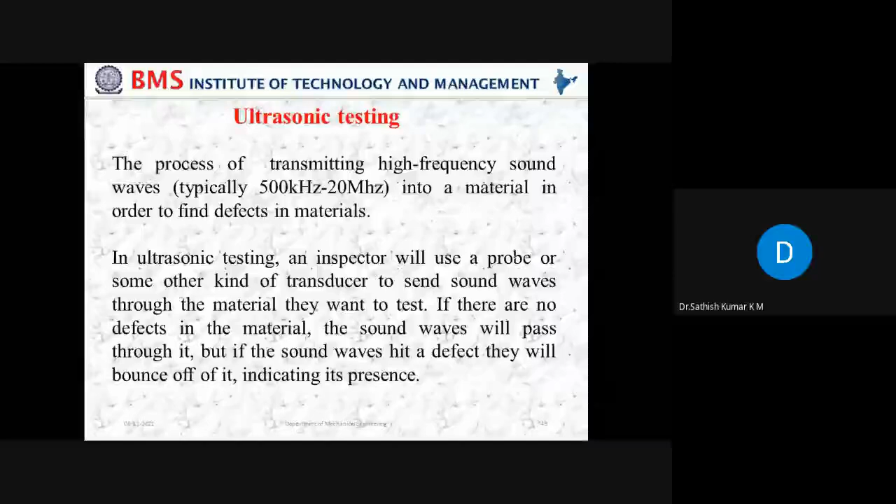Now whenever you pass on the sound waves, if there are any defects present, it obstructs the sound waves by not passing on. That gives you an idea that there is something there which might create a problem, because the waves will hit a defect and bounce back, indicating there is some anomaly present in the system. So based on how it travels, depending on the way of traverse of the high frequency sound waves, you could make the decision about what is exactly present, whether some anomalies or defects are present in between.

So there are three different methods. One is called through transmission. In through transmission, we have two different transducers present, one placed on each opposite side of the material. One transducer creates a sound pulse, and the other transducer receives that particular sound pulse.

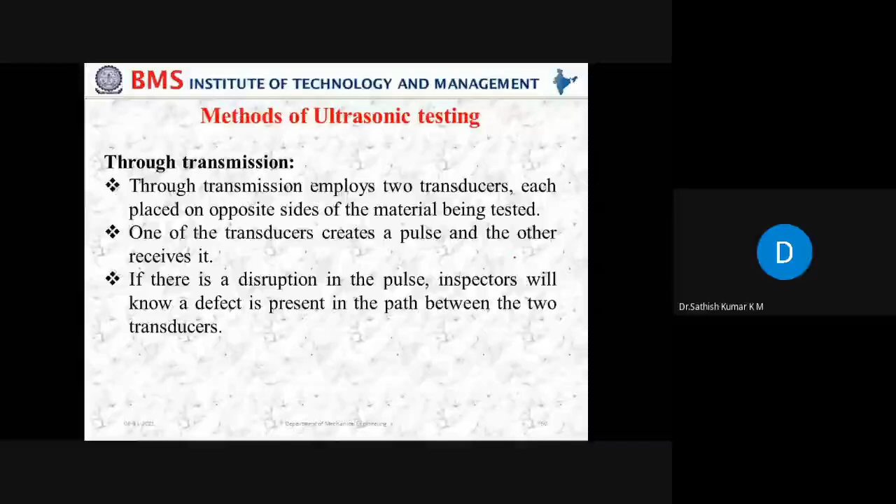Now you are sending a sound pulse of a certain frequency, ultrasonic waves. On the other side, you are receiving the sound waves. If you are able to receive whatever has been sent, it means there will not be any defect present in the path. Depending upon the disruption in the pulse, depending upon the amount of reduction in the pulse that the receiver gets, we could sense the presence of a defect in between the path. So this is called through transmission.

The second one is pulse echo, wherein it's not possible for you to have a transducer at the other side of the material. So it is more sensitive, and it is used to identify defects by measuring the time it takes the amplitude signal to travel between different points or surfaces in a material. Basically you are trying to understand what is the level of travel that it has made, depending upon the travel time.

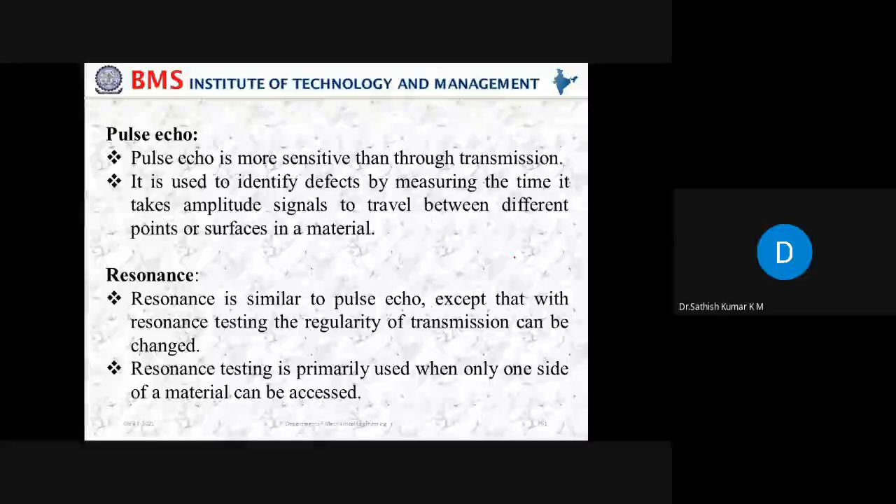Then we have the last one, called resonance, which is similar to pulse echo. Now let's see where ultrasonic testing is going to be used. The basic principle of ultrasonic testing is the use of sound to inspect a material's thickness at different points.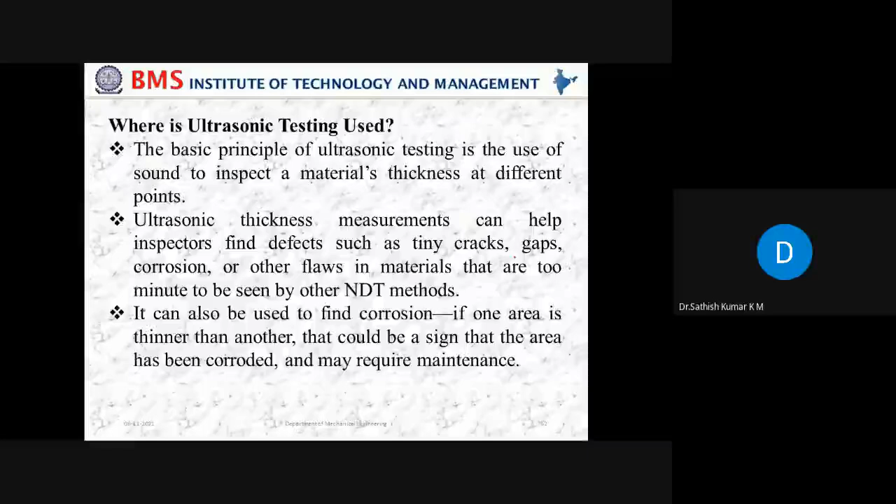Then the last one is remote visual inspection. I started with visual inspection, and now I'd like to end with remote visual inspection. Previously, a person's presence was required in order to inspect. But with the advent of newer technologies, with the presence of the Industry 4.0 concept, it is now possible to remotely capture images of what is happening.

For example, in a mine industry or where a fire has happened, it is highly not possible for a person to be present to know what is happening. So I can have RVI tools, remote visual inspection tools, which can collect the data remotely without the presence of a person. In-person requirement is not needed. Inspectors usually want to use RVI instead of conducting a visual inspection in person because the area that needs to be inspected is dangerous.

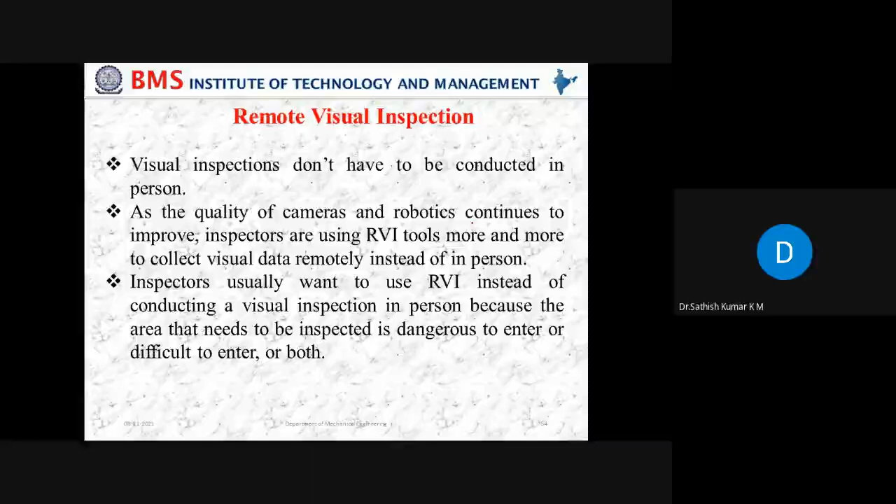Some fire hazard has occurred. Okay, so there itself you can able to make the data collection.

So this is the advances which has been present in case of the diagnostic maintenance, right?

So basically till this time what we have covered is the very basic techniques which are present in the diagnostic maintenance, right from the visual inspection, wherein observation is made, and then vibration monitoring. Then you could understand about acoustic emission monitoring, oil analysis, ultrasonic testing, and RVI, the remote visual inspection.

Now with all these different sections what we have gone through about the diagnostic maintenance, where do we stand basically?

So when we say about the diagnostic maintenance, as it was pointed out in the very beginning of the inauguration, prevention is better than cure. Basically the diagnostic maintenance is one of the very important technologies which needs to be done in a clear, concise way, so that you can cut down the breakdown to a very larger level. The idea is to have zero downtime at any period of operation.

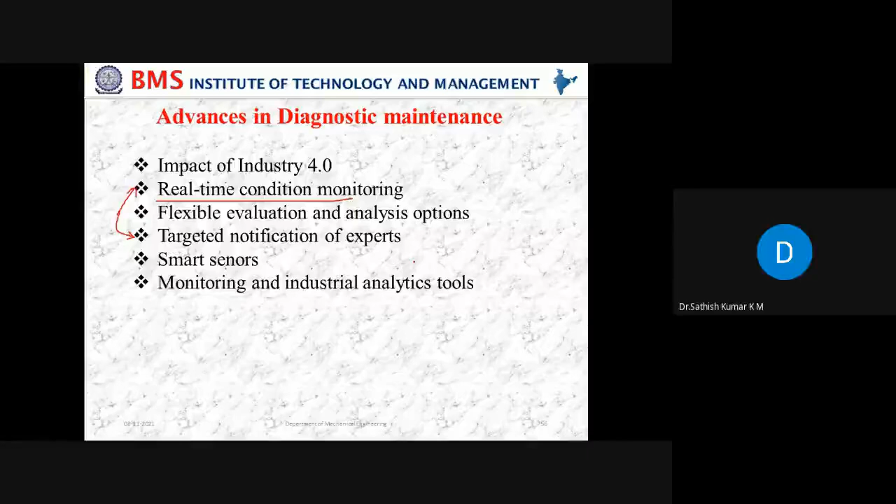These are the advances in diagnostic maintenance which we could observe in the near future, and which is happening. So with this, I'd like to put the concluding remarks on this.

I have made an attempt to give a broad perspective towards the concept of diagnostic maintenance: what is diagnostic maintenance, why it is important, and a broad overview of the various different techniques of diagnostic maintenance, from visual inspection to vibration, acoustic emission, oil analysis, ultrasonic, and all that. This diagnostic maintenance theme appears to be more realistic compared to other maintenance techniques.

Other maintenance techniques have their own disadvantages, because in breakdown maintenance you are checking only after everything is over, and in preventive maintenance you very often take the data, by which there might be more investment involved.

Diagnostic maintenance is continuously analyzing the data, and this is based on the fact that 99% of equipment failures are preceded by certain signs, conditions, or indications that such failure was going to occur. That means the essence of the statement is that any failure will not occur just like that—it shows some information, gives certain signatures, certain indications.

What matters, what is very important for us, is to pick those signatures—somebody is telling us something is going to happen. If we are not able to pick up that signature, those indicators, then we are not giving ear to those points, and subsequently the machine will definitely fail. It has told you something is going to happen, and that is what is very important, that you need to pick up.

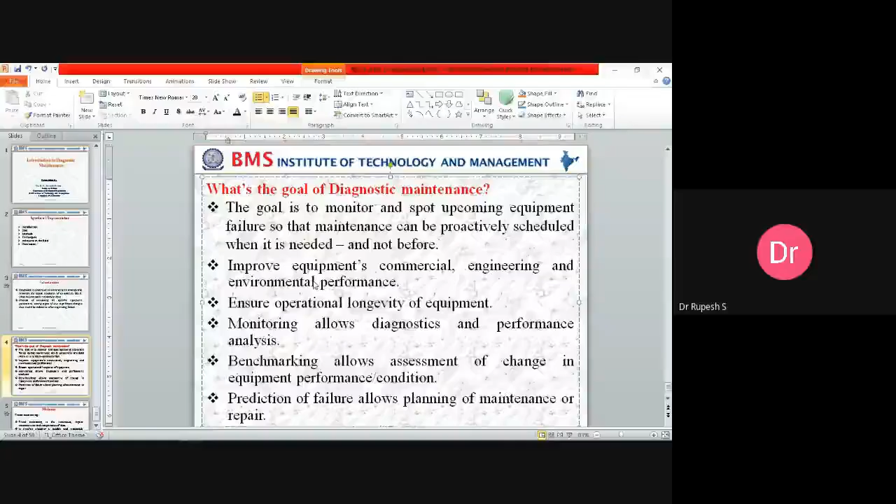In condition monitoring oil analysis, which techniques are more preferable—offline oil analysis or online oil analysis technique—which is most effective and most preferable for condition monitoring of oil analysis? This is my first question. And second question, can you tell us something about ferrographic analysis?

Okay, right, so briefly, with respect to oil analysis, basically what this oil analysis involves is you collect the oil samples, right?

You collect the oil samples and make the decision. As you go to collect the oil analysis, it matters that generally it is going to be an offline analysis only, because you take the oil sample, do the testing at a particular point, and then you take a decision. That is the oil analysis.